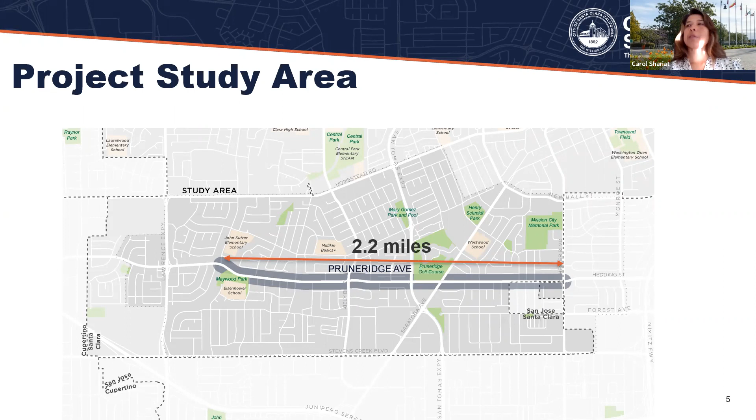So as a reminder to everyone, this project's along Pruneridge Avenue between Pomeroy and Winchester. It's about 2.2 miles long. And on the west side of the corridor, in Cupertino, you'll hit Apple Park. And on the east side, Pruneridge Avenue becomes Hedding Street, which is in the city of San Jose. Next slide, please.

So our project goal is to make Pruneridge Avenue a complete street, where we want to improve it to make it comfortable and safe for all users of the roadway. So what we're really looking at is trying to improve bike and ped connections along this corridor. So as part of the plan, we have analyzed and summarized our traffic, parking, and collisions along the corridor, which we presented to you at the last few workshops.

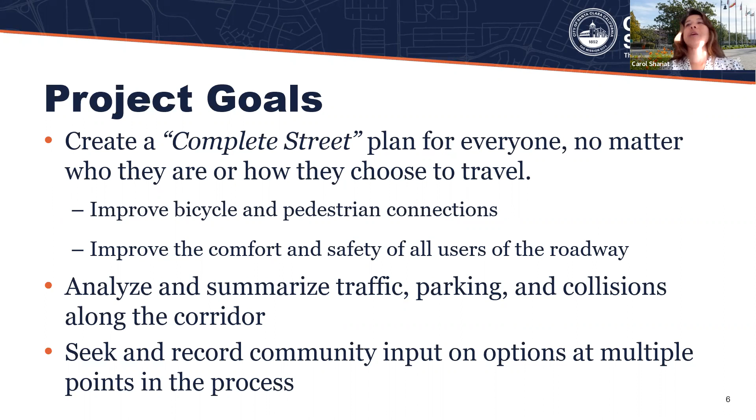And then as part of this project, we have been trying to meet with you all along the way to get your feedback, as you know, now that we are in this 7th community meeting. So at every point along the way, we have tried to record your feedback. Next slide. And once again, we're here at workshop number 7, and we have revised our concepts, and that's why we're bringing them to you tonight and introducing this new concept. In the summertime, we'll bring this plan to council for their review and consideration. Next slide.

So what have we done to date? We've done some initial community engagement at the beginning of the project. We have sent out probably around 7,000 flyers per round of workshops. We did 2 workshops at the beginning. We did online surveys, and we also met with some stakeholders as well to get their initial feedback.

Then we had the consultants draft up 3 corridor concepts based on this initial feedback that we got from the community. Then after the concepts were developed, we did another round of workshops. And once again, we did online surveys, we did pop-up events, and we met with our Bicycle and Pedestrian Advisory Committee as well to get their feedback on these draft concepts.

Then we also did some traffic analysis where we looked at parking, we looked at level of service and intersection delay, as well as travel time along the corridor based on the concepts that we developed. And we made some tweaks to our corridor concepts based on some of the feedback that we heard from the public from our online surveys that we had posted on our webpage.

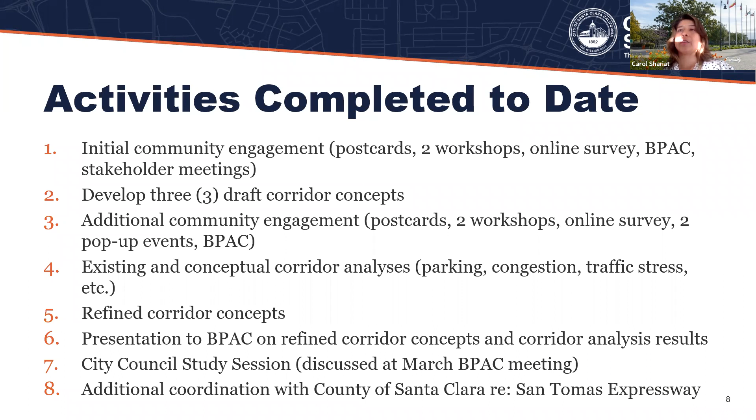And then finally, we have done some coordination with the County of Santa Clara, as the County of Santa Clara has jurisdiction over San Tomas Expressway. So we needed to get their feedback as to the changes we wanted to do at that intersection. Next slide. And then with that, I'm going to pass it over to Alta Planning with Ryan Booth.

Great, thanks again, Carol. I'm going to jump into our 4 roadway concepts. Again, these were presented at the previous sessions, but we did make some revisions, which we'll talk about later. So this should be a recap for anybody who's been here before, and for anybody who's new, please follow along. So for roadway concepts, after we collected initial public feedback in our first round of engagement, we worked with the city staff to develop multiple design scenarios that responded to the comments we received.

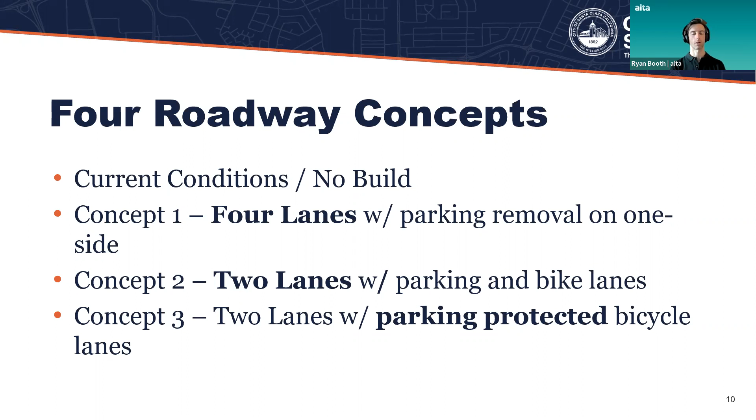The concepts listed here are the current conditions, also spoken about as the no build option. We have concept 1, which retains 4 lanes throughout the corridor and would require parking removal on one side of the street. Concept 2 would reconfigure the lanes to 2 travel lanes, retain parking on both sides of the street, and would add a bicycle lane. Concept 3 is a similar configuration, except the change here is that the bicycle lane would be a protected bicycle lane by parking. We'll illustrate these and show you some graphics here to reiterate their points.

All right, so getting into each one individually, first up is the current conditions or no build. This again is how Pruneridge exists today. The no build option would retain parking as it exists. The traffic lanes remain the same. Level of service, traffic delay would remain the same. Travel time along the corridor remains the same. Speeds, there would be no impact due to design. Collision frequency would remain the same, and no bike ped improvements. So that's as it is today, and would be the no build option.

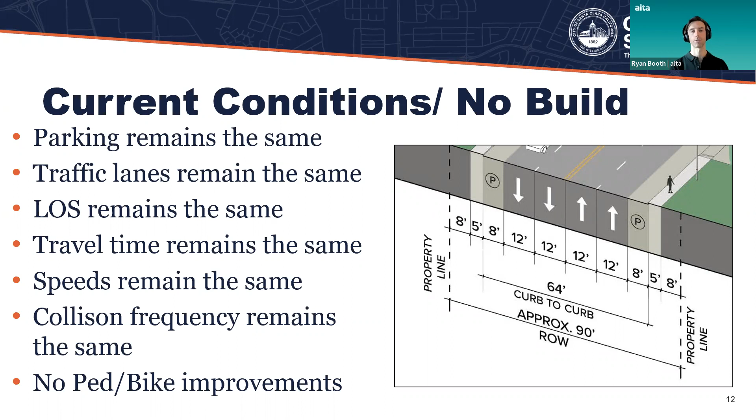So moving on to options that did some configuration with the design of the roadway. First up is the 4 lanes with parking removal on one side, concept 1. So in our illustration here, a few things to point out is that this would narrow the travel lanes, which has been known to reduce speeds. This improves walking conditions by shortening the crossing length at crosswalks, but also separating traffic from the sidewalks a little bit farther.

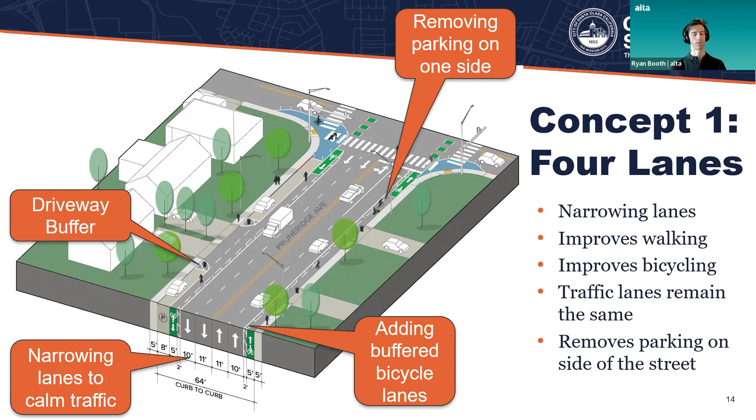This improves bicycling by adding a marked bicycle lane on either side of the corridor. The number of traffic lanes remains the same, and it would require the removal of parking on one side of the street in order to fit all of the other items in. Another feature here to improve roadway visibility for drivers coming in and out of the driveway are these driveway buffers at the parking. So pulling the parking back from the driveways a few feet to allow drivers to get in and out of the driveways easier, and for visibility for anyone biking along the corridor.

So in summary, for concept 1, this would maintain 4 lanes, so no change to the vehicular travel, or minimal. No change to the level of service at the intersections because there's no reconfiguration. Travel times would not be impacted, and there'd be a possible speed reduction of 1 to 6 miles an hour due to the narrowing of lanes and adding of a bike lane. This would remove parking on one side of the street, but even after all that parking removal, it's estimated that the corridor would have 35 to 38% parking utilization.

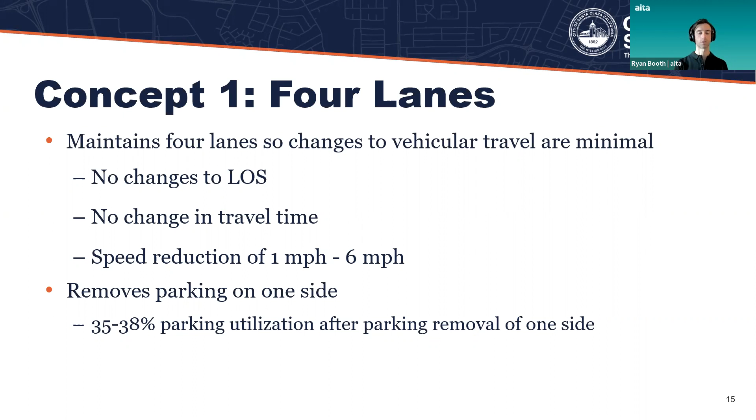Moving on to concept 2. So this is the 2 lanes with parking and bicycle lane. As you can see here in the graphic, again, it introduces lane narrowing and the reduction of travel lanes in total. This includes a center turning lane to assist drivers getting in and out of driveways.

This improves walking by further narrowing intersections and crosswalks. Improves bicycling by providing a buffered bike lane, with additional separation from traffic. Preserves parking on both sides, but as you can see here, we also added the driveway buffer to improve visibility for both cyclists and people getting in and out of their driveway. This does remove a travel lane, and it adds a center turn lane, like we said.

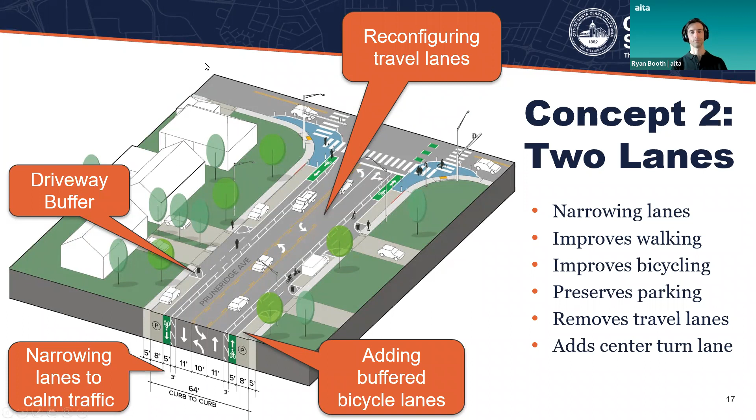So again, narrower lanes. This improves walking even more by reducing the crossing distance for pedestrians. This improves bicycling conditions over the previous one, providing even more protection and separation from moving traffic. Preserves parking along the street, does remove a travel lane in each direction, and adds a center turn lane.

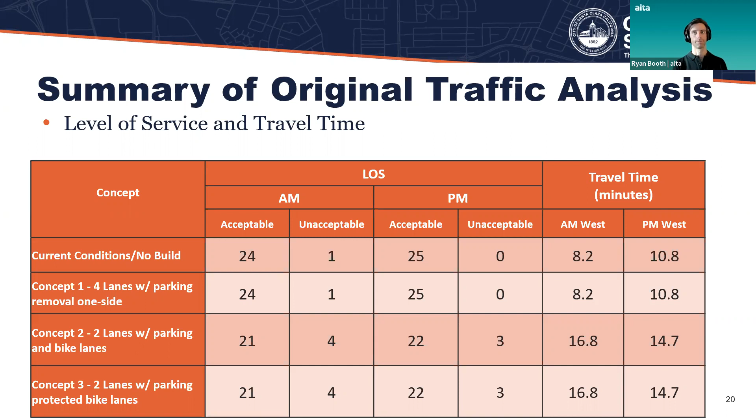All right, so we brought these concepts to City Council study session and coordinated with the county. We met with the City Council on March 8th and county in mid-April. The main City Council feedback was they wanted us to consider options for pilot projects. And a pilot project would be a quick installation to show and test the feasibility and the designs and get additional feedback.

City was also interested in considering reversible lanes similar to Lafayette or time of day parking removal. The city had concerns with the corridor travel time delay with the project, which we'll touch on again in a minute here. The Santa Clara County also gave us some feedback, and they had concerns with traffic progression along the expressways, especially with concepts 2 and 3. So we'll talk about what that means at intersections which are county owned.

So updates from a previous presentation on concepts 2 and 3 to address those concerns. As a result of coordinating with the county, we revised the traffic analysis along the expressways. The expressways are owned by the county, and the city discussed with them the prospect of reducing dual southbound turn lanes to one turn lane at the intersections of San Tomas and Pruneridge. The county expressed concerns of reducing traffic progression of the expressways with roadway reallocation on Pruneridge Avenue.

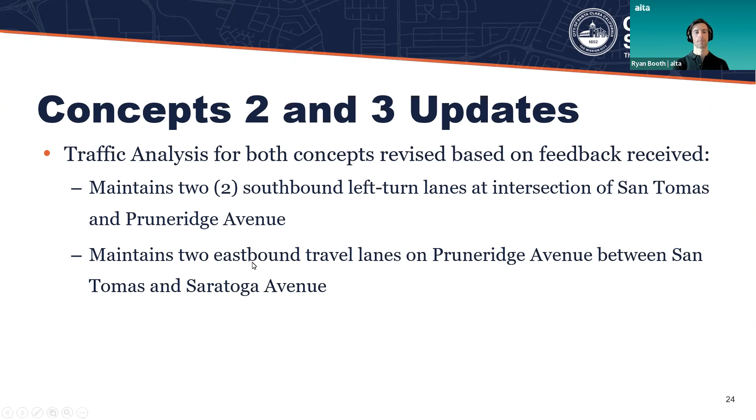So just to show again, the intersections of San Tomas and Saratoga are both owned, managed and operated by the county. So we have limited ability to change those, and we also need to coordinate with them on any changes to the corridor that we proposed.

This is where we have 2 eastbound through lanes and 1 westbound lane for concepts 2 and 3. The second eastbound through lane would become an exclusive right turn lane at Saratoga Avenue, and we would retain the 2 southbound left turn lanes at San Tomas intersection. This is where we made the updates to the traffic analysis to respond to concerns from the county.

So based on these new assumptions, our analysis showed minimal changes to the delay. It did not alter the thresholds for which intersections are acceptable or unacceptable. We expect that there would be less congestion for people getting into Pruneridge from San Tomas. Even though we maintained the second southbound turn lane, this didn't change the overall level of service from the previous analysis.

So in response to both the City Council and public feedback we heard, we'd like to introduce this new concept 4, called the hybrid option. So we created this to meet project goals and reduce traffic congestion based on the feedback we received.

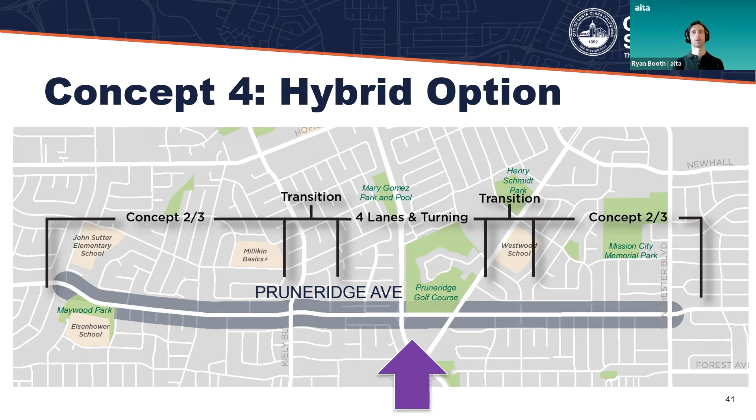Now to the meat of the corridor, the hybrid option. This would be retaining 4 lanes to meet the project goals and reduce traffic congestion based on our previous concepts. So here in the middle of the corridor there would be 2 travel lanes in each direction and a center turn lane. No parking in this core of the corridor, and that would accommodate buffered bicycle lanes or separated bikeways.

And then as we move to the county intersections, as you see here, we would maintain the current operations. The buffered bike lane would make its way to the intersection, and then there would be what's known as a mixing zone, where vehicle traffic and bicycles would have to mix momentarily. And so this example illustrates what a county-owned intersection such as San Tomas would look like.

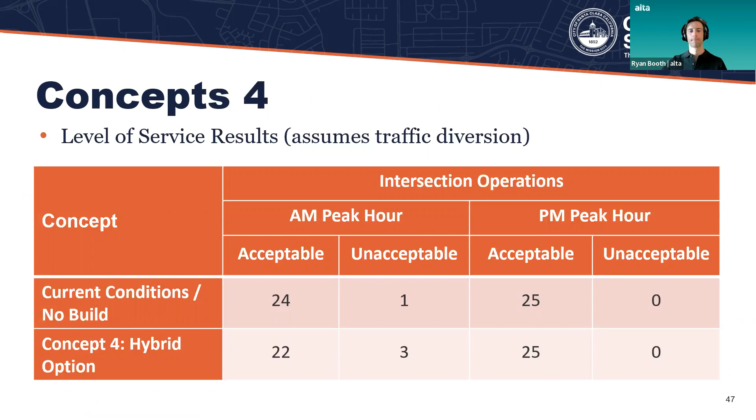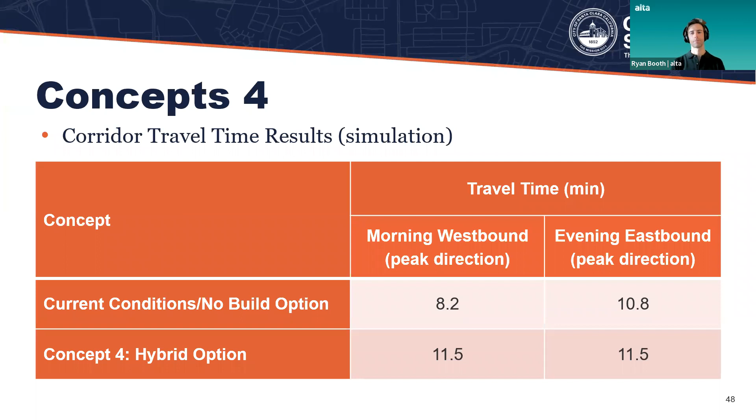Concept 1, 4 lanes with parking, does narrow lanes and could potentially reduce speeds by up to 6 miles an hour. The revised concepts 2 and 3, again, revised to accommodate turning movements at San Tomas and Saratoga, would include lane narrowing, lane reduction, increase in safety, and a possible reduction in overall speed. And the concept 4 hybrid that we've shown does include narrowing, lane reduction at the 2 ends of the corridor with the transition zones and turning movements in the middle that we showed, possible safety improvements, and also potential speeding reduction.

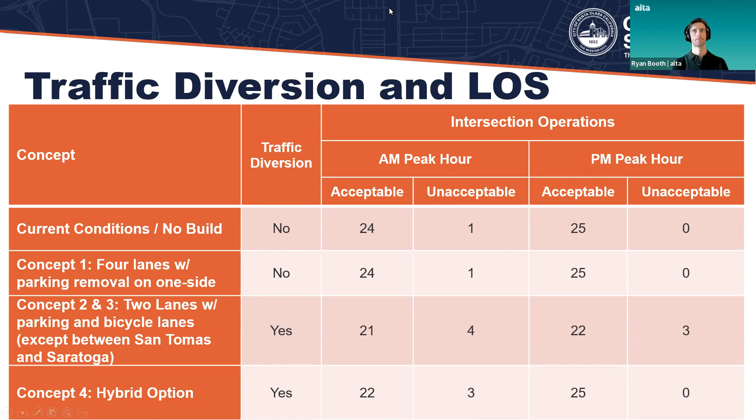So in summary, overall, the current conditions or no build option only provides a retention of current conditions. There are some benefits to concept 1 in possible speed reductions and safety improvements, but there is an impact to parking. The revised concepts 2 and 3 have potential speeding reductions, safety improvements, and retain parking, but would have an impact to traffic delay, and also improve walking conditions. And concept 4 tries to strike a middle ground there, and as was shown, mitigates the traffic delay as much as possible.

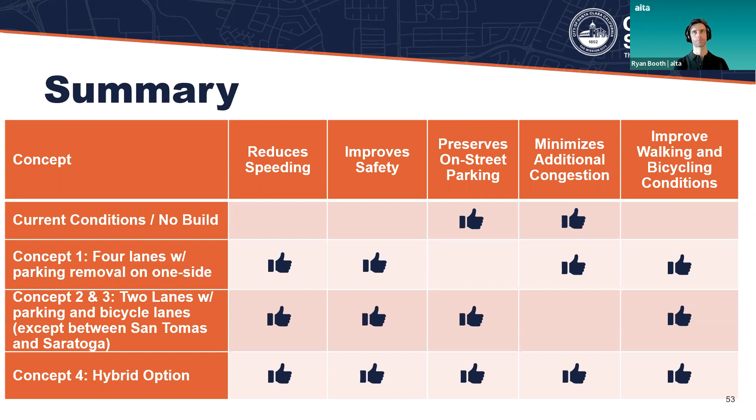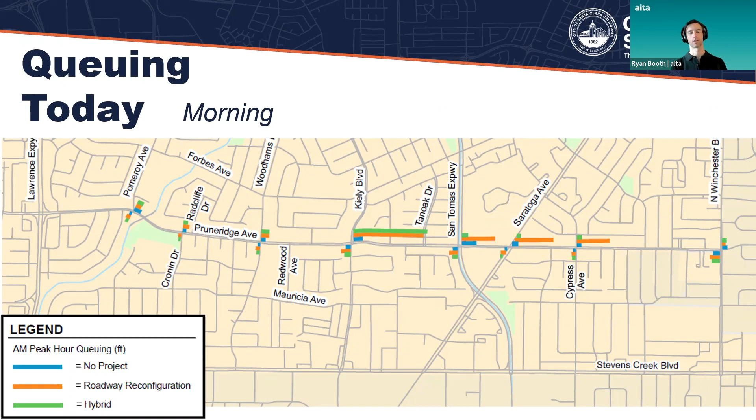So just to illustrate our point here, blue representing concept 1, the no build, or as it exists today, is the queuing or traffic delay as shown in the graphs here. Orange being concepts 2 and 3, the roadway reconfiguration, and green being the hybrid, which is concepts 2 or 3 at either end of the corridor, the transition zone, followed by 4 lanes with turning lanes in the middle near San Tomas and Saratoga. There's morning delay and evening delay. So you can see there is an improvement with the hybrid, but it does still include some delay.

So we'd like to open it up one more time for our third poll. Please rank the concepts in order of your preference. Yep. Actually, can we hold off on the poll for a second? I think it would be great if we can let the community ask questions first. Sure thing. In case they have any questions on the hybrid or anything before they vote. All right, great. So we're going to open it up for questions. Keep submitting your questions to the Q&A box. Also, we're going to allow at this time you to use the raise hand feature, and we can answer your questions live.

All right, looks like, let's see, got Ken Kratz. We got a question. All right, Ken. Yeah, can you hear me? This is Ken Kratz. Yep, loud and clear, Ken. Nice to hear you. If I could have a minute or two, it would be nice.

I did attend the BPAC, and you answered some of my questions that I had from the other day. I like option 2, and I'm wondering if option 2 would allow the street between Pruneridge, between the expressway and Saratoga, to remain with 2 lanes in both directions.

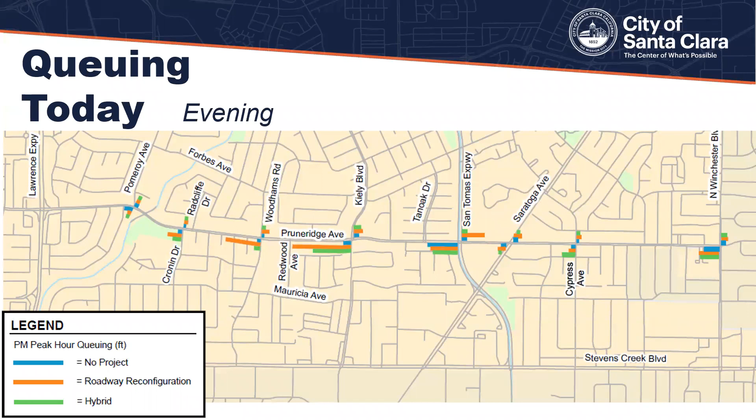Could we lengthen the 2 left turn lanes on the southbound San Tomas Expressway, lengthen those so that the cars could queue in that longer left turn lane pocket? And so we don't have to use option 4 at all. Now, if we can't do that, then I'm for option 4 with option 2 on the 2 ends of it. I think it's better.

I'm a little worried about option 3 with the parking protected bike lane, because I'm wondering how the garbage cans are going to be placed once they're emptied by the garbage trucks, and if they'll be able to hit those little areas where you put them out. I know in my neighborhood, if there's any wind, it tends to blow the cans either over on their side or towards the curb. So that would be in the way of bicyclists.

And I know San Jose has these parking protected bike lanes in downtown, but I think it works there because they have very few curb cuts. They don't have isolated homes with a driveway at each spot. They have just occasional parking garages, and so they don't have those interruptions with garbage and people accessing their car that much on the street.

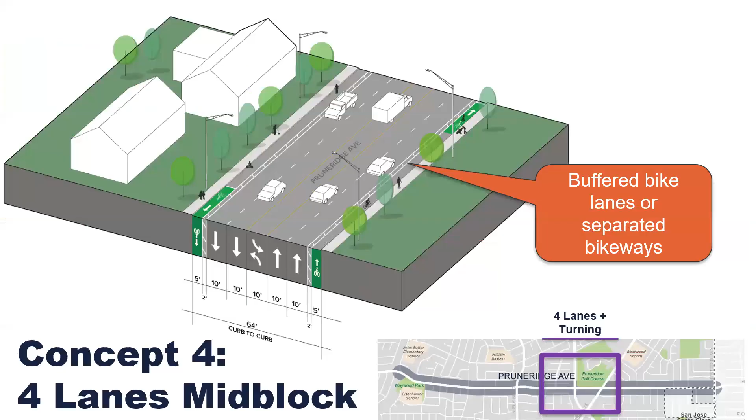So Jason, at the intersections of San Tomas, this is what we've modeled this illustration off of here. The bike lanes stay. The parking, which is actually restricted currently at the approach of San Tomas, is not there, and there's the addition of the turn lane. And so you can see here that there is a bike lane that remains, and there's a waiting area at the light there. This is for concept 4.

Okay, so for concepts 2 and 3, are those basically only viable as hybrid options due to the county's requirements? No, for concepts 2 and 3, the only change you'll see there is from San Tomas to Saratoga, because we'll be keeping 2 southbound left turn lanes, which means we'll have 2 eastbound through lanes between San Tomas and Saratoga. And then that second eastbound through lane will drop off and become an exclusive right at Saratoga. So then you'll have that roadway reconfiguration again. Okay, I think I got it.

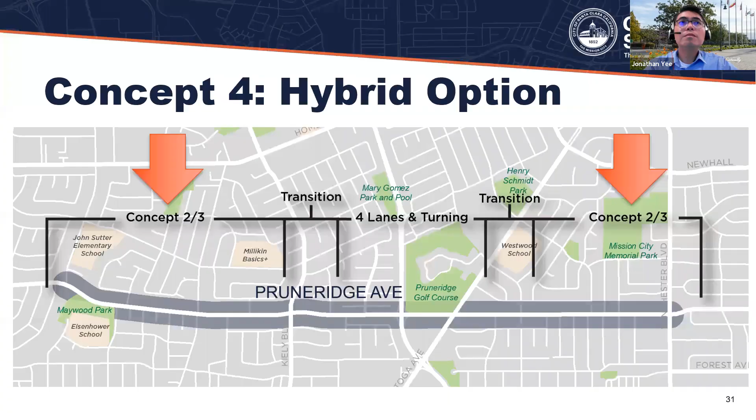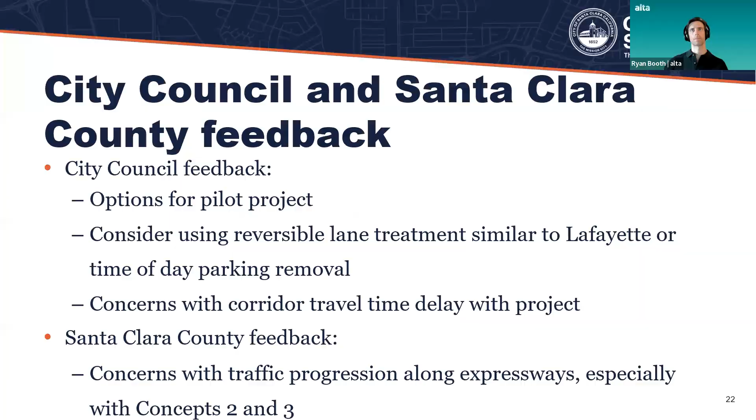Ryan, could you go to a prior slide just to point that out? It's the one with the aerial grayed out, but we have the box around that specific change. It's lower down here. Oh, right there. So just to confirm what Carol was mentioning, the only change for concepts 2 and 3 is that the eastbound direction, as shown on the right side of the screen, would be 2 lanes, a bike lane, and no parking. And we just wanted to highlight that there is no parking on street today. So that would be the only change.

Oh, I see. And then the westbound direction would go to a single lane, and that's where the bike lanes would come from. Correct. Okay, got it. All right, great. Thank you very much, Jason.

Let's see, up next, Mark. Can you hear me? Yes, thank you very much, Mark. Hi. Yeah, I do appreciate all these different webcasts that you have. I feel like you're actually responsive to feedback.

And so I wanted to say I've been here in Santa Clara for quite a long time. And I bought specifically here because I don't like long commutes. Otherwise, I would have bought somewhere else, like in East San Jose or somewhere around Evergreen. And I'm all for bicycle lanes, but I'm not for reducing the amount of through traffic that goes through the area because that'll slow down commutes.

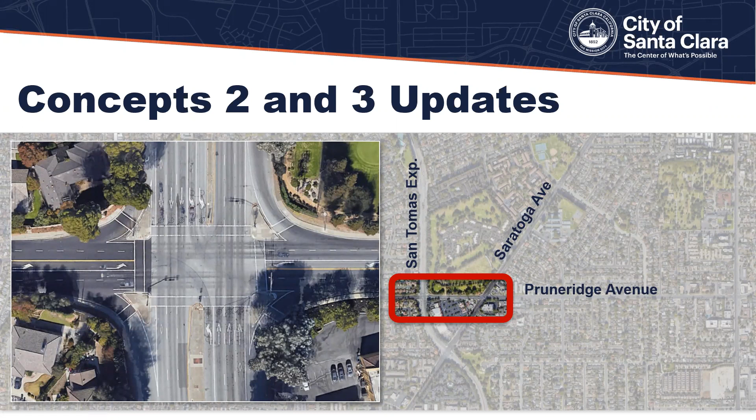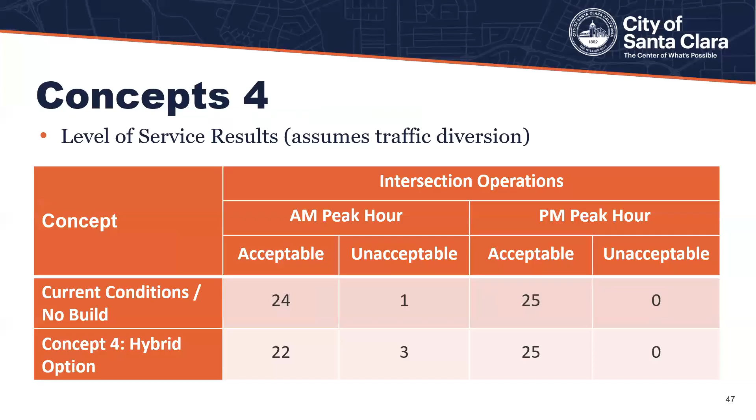I do have a question about whether some people who don't want to speak up will have their voices heard. Is there a way to put this kind of thing to a vote or something, so that not only the people who want to speak up are heard, in terms of which concept they would like or which concept they would not like? So that's kind of my question.

Well, thank you very much, Mark.

So, ways to stay involved. We have an email line, which we've been receiving comments on since the start of the project. There's also a voicemail line. There'll be a survey with all the things we've presented today on the project website, santaclaraca.gov/pruneridgeave. And that project website has all of the documents and pieces that we've presented to date. So that's your landing zone for all things Pruneridge Ave. So feel free to follow up with additional questions by either sending us an email or dialing and leaving a voicemail at the number below.

Okay, thanks. Yeah, and Mark, probably early next week we will have an online survey, as Ryan had mentioned, where people that could not make it can still vote on their preference for all the concepts. And we will also have the recorded video on the project website, in case people couldn't make it, so they can at least watch this presentation before they vote.

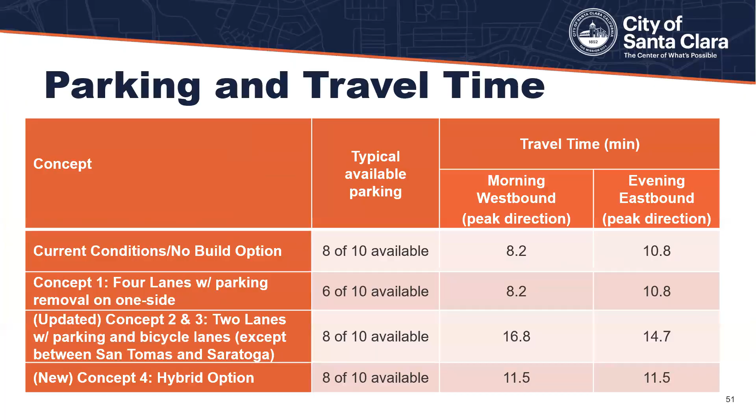Thank you very much. So it seems like option 4 extends Hollenbeck's configuration further east and extends the configuration we have now between Lawrence and Pomeroy further west, but then there's still a transition point in the middle. So it's like the two ends are getting closer together, but then we still have this transition we have to go through in the middle. So keeping that confusion of lanes narrowing and getting wider and narrowing again, which doesn't seem ideal to me.

And I asked a question in the Q&A I didn't see answered. So we talk about the level of service not being acceptable at some of the intersections, and I'm wondering how it compares to the same stretch along Homestead or along Stevens Creek. Is the level of service that's being called unacceptable better than what we get at Homestead and Stevens Creek, or are Homestead and Stevens Creek level of service better and the traffic could move from Pruneridge over there?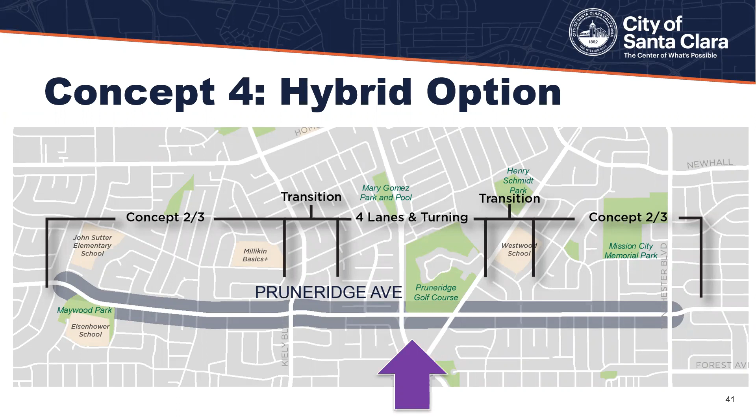Ryan, I think you could probably bring up that graphic that shows the level of service at the study intersections, so Ms. Rodriguez can see there. So if you can see, Ms. Rodriguez, we did look at about 25 intersections. We didn't go down as far as Stevens Creek. Mainly we were sticking close to Pruneridge and then some parallel corridors adjacent to Pruneridge, just to capture any cut-through traffic that may occur if we happen to narrow Pruneridge.

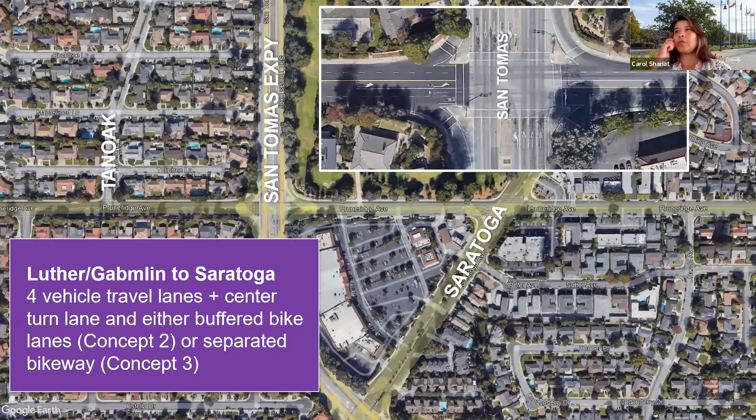A few more here. We got Vivek up next. Can you hear me? Yes. Thank you. Hi. I'll make actually 3 points here. First of all, I think this is an important observation that I hope the city is taking into consideration, that the stretch between San Tomas and Lawrence Expressway is a purely residential area with a park where kids play towards Pruneridge, and also a school, and a lot of people on the streets going to the park and so on. So whatever decision we end up with, the safety of people along this very residential stretch is very important in my opinion.

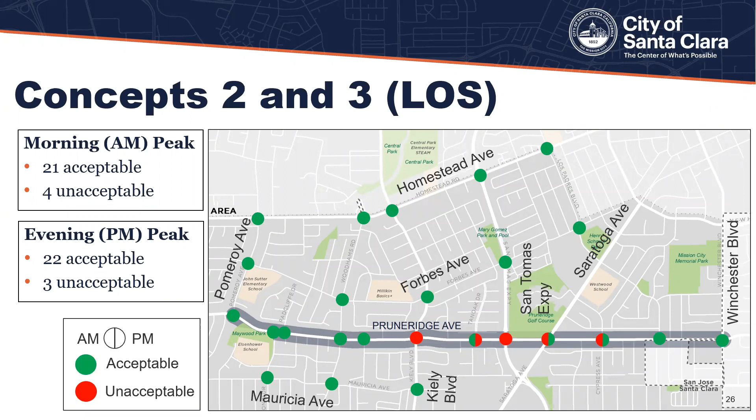So, those are the 3 things I wanted to highlight as we look forward into this redesign. So it's residential. Second is, this has become a zip through for traffic going between these 2 expressways, a very residential area, and we should think about uniform flow. All right. Well, thank you very much, Vivek, for your comments and your observations.

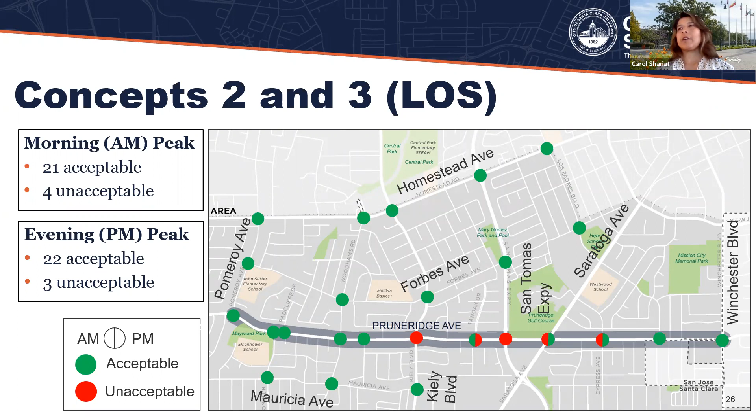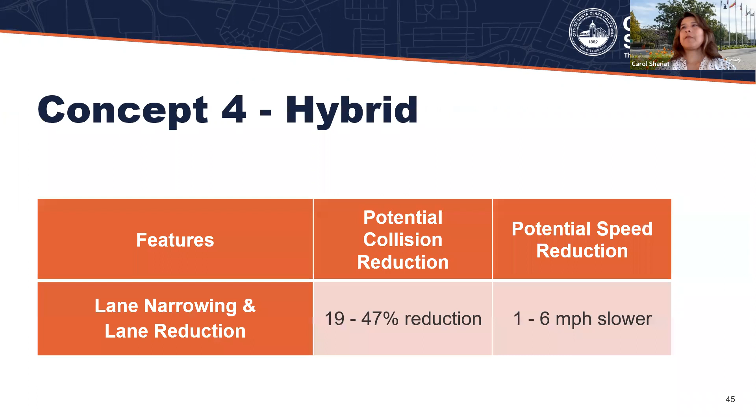Ryan, I think it would be great if you could show that slide again, showing the speed reductions that you would get based on the different concepts, so people can see, if they were to choose which alternative, the potential reductions in collisions and speeds depending on which concept you would be interested in.

All right. Okay. Last call for questions here. And if not, we'll move on to the poll for which concept you prefer. All right, let's move on here. Oh, we've got Diane with a question. All right, go ahead. Can you hear me? Yeah. Yep, we can hear you now, Diane.

Thank you. Why are we going ahead looking at options 2 and 3 if the county has said they're not acceptable? To me, this is an exercise in futility because they're going to get their way at the end of it all. So at the beginning of the presentation, we showed you concepts 2 and 3 as we previously presented. We took the feedback from the county, and then we revised the concepts. So concepts 2 and 3 are still possible with the revision concerning the turn lanes at San Tomas. That's okay. So it doesn't have to be 4 for the county to approve of it.

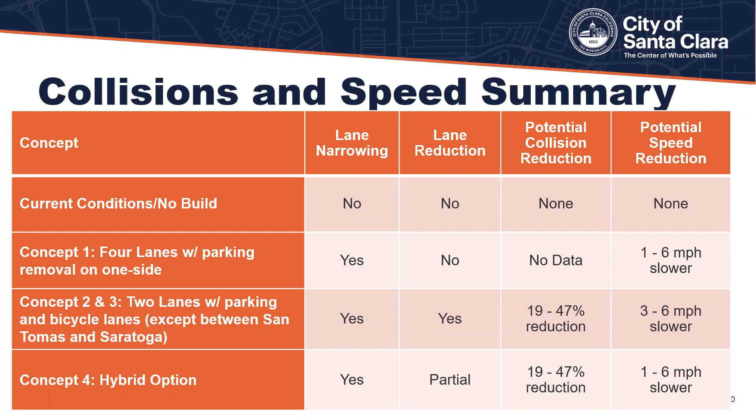That's correct. 4 introduces the hybrid option, which takes away the roadway reconfiguration in the middle of the corridor and reduces traffic delay compared to just options 2 or 3. Okay, and I would suggest as consultants that the next time you do a project that involves county or state input, that is something that you get off the top so that you don't have to waste time designing something they're not going to approve of. That's my opinion. Thank you. Well, thank you very much, Diane.

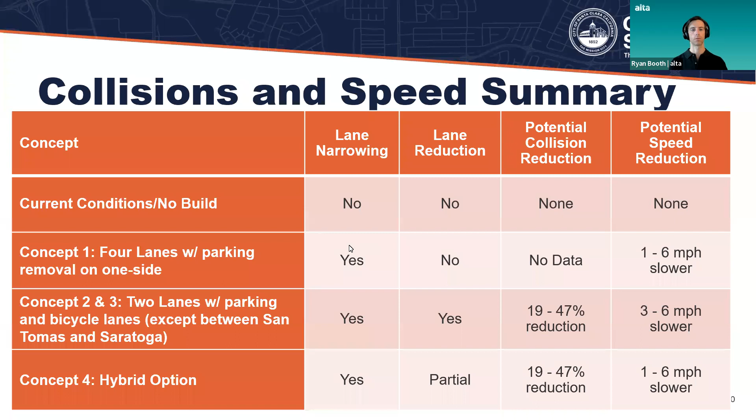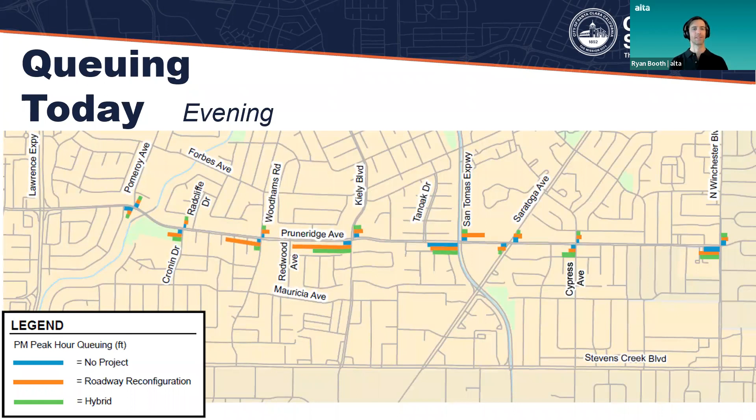Okay, great questions, everybody. Thank you for participating tonight. We'll move on to the poll for preferred concepts. Ooh, Ken, we'll get one more question. Let's open it up for Ken. Ken just lowered their hand. Okay, so moving on to the poll, final call.

Zoom poll 3. We're gonna ask you to select your preferred alternative. We're gonna do it in ranked choice. So please rank your choices from 1 being your most preferred to 5 being your least preferred. Each one gets a number. And we'll show you the results here in a moment. So again, that's 1 most preferred option to 5 least preferred option. Give folks another half a minute here or so to put their preference in.

All right, just a few more seconds. Go ahead and rank your preferred options from 1 being the most preferred to 5 being the least preferred. Just a few more seconds here.

And again, we'll post these results, and you can always get in touch with us. We'll put those sources to either send us an email or voicemail back up on the page before we close it out here. You can always visit the project website. And you'll get to vote one more time if you like online, an online survey that we'll post probably next week after this meeting as well.